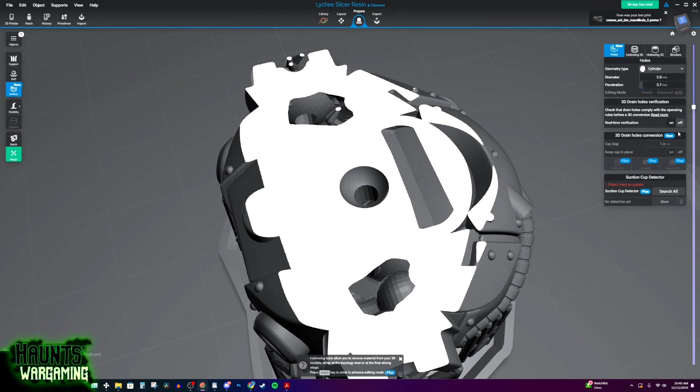I have been using nanobulbs mainly to cure the interiors of my models. The only things smaller than that are fiber optic cables, and I haven't really had much success using those. So I stick to nanobulbs. The one that I use is, I believe, 3 millimeters wide, but then the base is closer to 4 millimeters wide, and then the actual cable, since it's wrapped with tape, it's about 5 millimeters wide. So that means that any hole that I'm sticking that through needs to be at least 6 millimeters wide. Because ideally, you never want that cable to touch any of the resin that's uncured, because you're not going to be able to cure the resin as easily once it's on the cable.

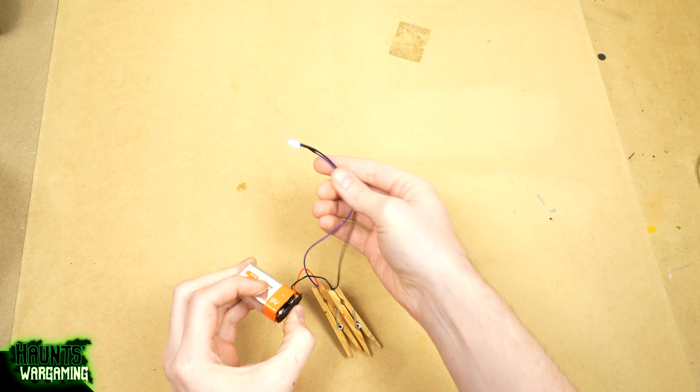So originally when I started doing this, I was just buying nanobulbs separately and then just attaching them to a battery. One thing I don't think I've ever heard anybody talk about is the power of the battery. Most people I see using 9-volt batteries. The more powerful the battery is, the stronger the beam is going to be. My biggest issue with batteries is that they die over time. And because of that, you get a gradual decline in the strength of the light.

That's why I prefer this plug-in model that I bought on Etsy. Since it plugs in, it has a consistent voltage, and it's nice and strong. It's pretty comparable to the 9-volt battery. You can see it's a little bit stronger. The 9-volt battery will work, but if I ever have a chance to buy the plug-in version of something over something that's battery powered, I always go with the plug-in version because I like to have that consistent power. I just don't really like having to deal with batteries. Either one will work pretty well for you, but I prefer the plug-in version.

Also, another thing nobody ever really talks about is how narrow the beam of light is on these bulbs. Think of that beam as the sweet spot for optimal curing. When you're curing the inside of the model, you want to be able to focus that narrow beam on every surface of the model for at least a few seconds. If that isn't possible, one thing I do is I'll add some water to help reflect the light.

As far as software, I use the free version of Lychee Slicer, so I'm not going to be getting into any of the pro features. I personally don't think you need them for this type of work. There are a lot of great features in the pro paid version of Lychee Slicer. I just personally don't feel like it provides enough value to justify me paying $10 a month for it. I wish more companies would go back to the pay once and you're done model. Like if they would offer a lifetime license for like $60, I would buy it today.

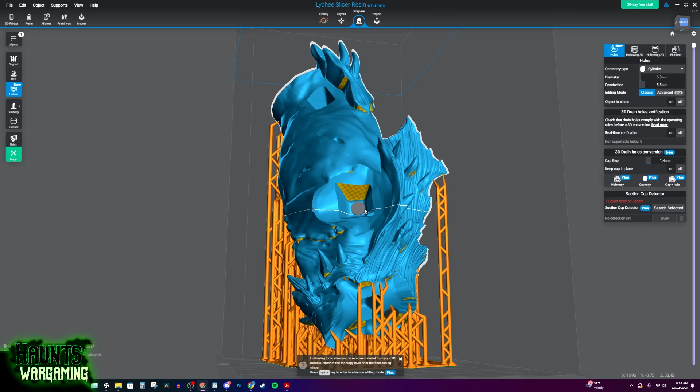This one down here's 5, up here 5 again. There's one over here that's also 5. So the first thing that I do is start looking at the inside of the model, and I work from the bottom up. You can pretty much just get rid of all of these.

And one spot that I've found that's consistently good for adding holes is where these key spots are. These are the spots where you connect two pieces. So we'll start down here at the bottom. This is the first spot that I want to look at. I'm going to put a hole on the back side of that.

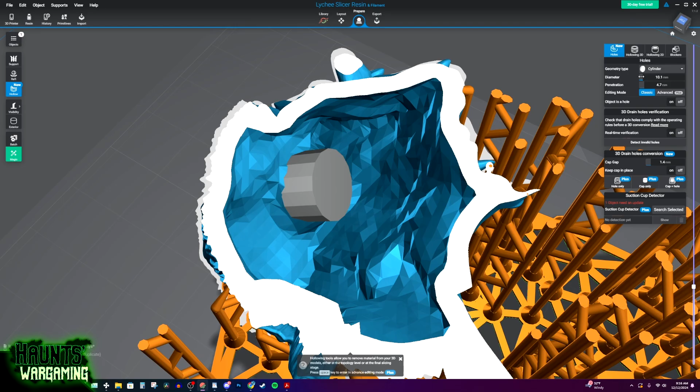I'm going to widen that as much as I possibly can. I don't want it to go into the sides. I just want it to flatten out that nub as much as possible. Something like that. The penetration is pretty good for where it's at. Then I'll just scroll through that, make sure everything's looking okay, make sure there's no islands. It's looking good. And you see that's going to give us a much wider hole.

And while we're down here, that's going to be the primary hole for this section. You can add smaller holes just to kind of help with drainage, but you need to have those holes for curing as well. And that's one thing that I just consistently do not see in these models. I think there was a hole here before. That's a good spot. These don't need to be any deeper than the actual wall.

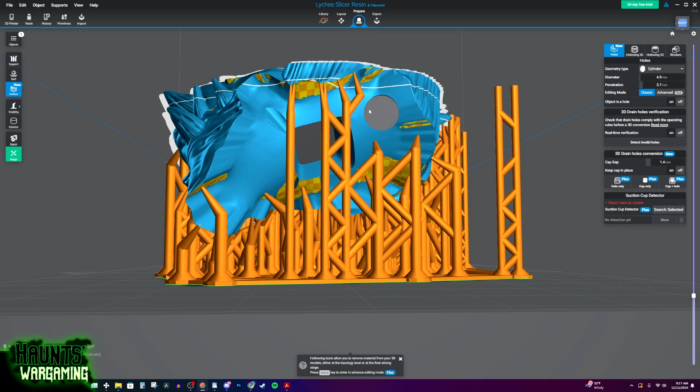So we can take that down to like 4. That's good. Put another one over here. That looks pretty good. Move up to the next one. You can see there's a spot right here. You've got to watch out for spots like this that might be tricky to get light into. This to me doesn't look like it needs to be supported, so I'm going to delete these supports.

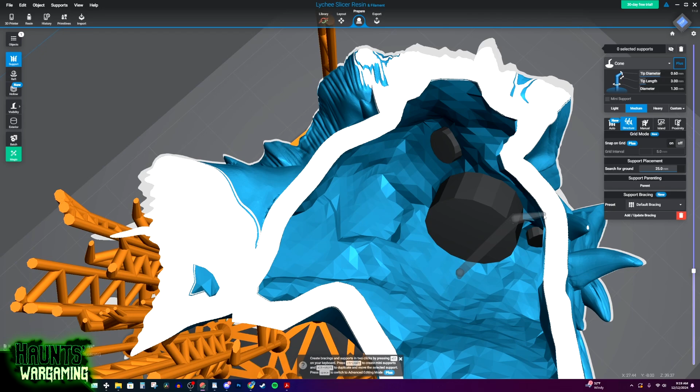This one I'll keep in, even though I think you'd probably be okay getting rid of it, but I'll keep that in because it's not going to block as much. The thing with internal supports is that they're going to block the lights and keep anything back here from curing as well. So another rule that I have is to try and use as few internal supports as possible. It really just makes me cringe when I see a model that's just absolutely filled with internal supports. Like that's just one of the cardinal sins to me.

Going up here a little further, you can see there's another one here. Same thing, I'm just going to make that as big as I can. You don't want it to go into the sides of the model. Just make it a little deeper, and that's looking good. Same thing over here. Same thing over here. This one's a little bigger.

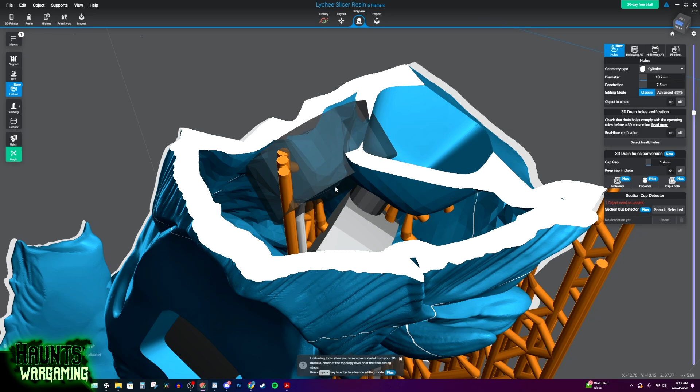Now here you can see there's a bunch of supports. We're just going to ignore those for now. I want to get my holes in place and then see which supports I can get rid of, which supports I can move around. Up here at the top, it's getting a little trickier. There's a lot of congestion, a lot of spots kind of connected and very close to each other. Again, we just want to make sure that it's not going into the wall. See right here, it's going into the wall a little bit. So I gotta adjust that.

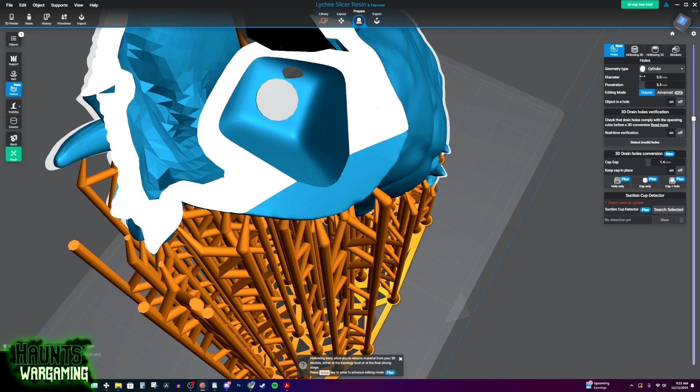Looking good. And for this top section, since there's so much going on down here, I am going to go through from the outside. I'm going to leave this one in place. I'm just going to make it a little bigger. And I want to make that as shallow as possible, about 2.5.

So yeah, that's all of our holes in place. You want to make sure there aren't any holes on the outside of the model. That's just going to be more work for you post-curing. The point of this is to make the post-processing as easy as possible. So now we have to redo the supports. You can see since I blocked this whole spot off here, we don't even need these supports anymore. Don't even need them. So you can just delete all of those.

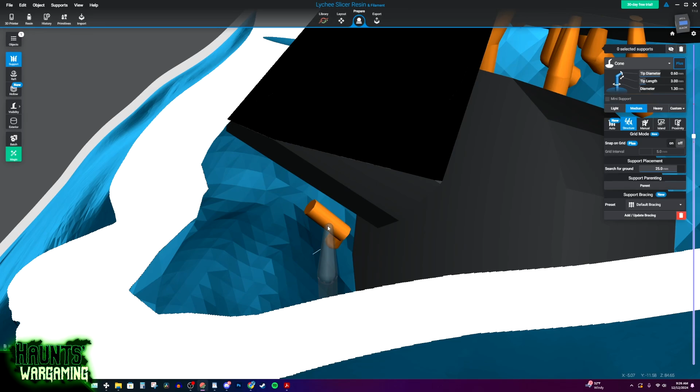There's a tiny spot here. It can be a little tricky to get your camera positioned right. So with this spot, I'm just going to increase the penetration of this hole a little more. There's a spot here that glitched out and it won't let me delete this. If I was actually printing this out, I would have to restart at this point to get rid of that. But I'm not going to do that.

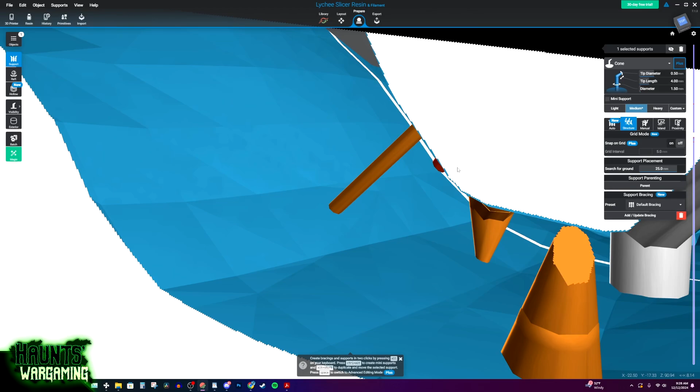I'm just going to keep deleting all of these supports. You really have to be careful that you don't accidentally delete the wrong thing here. There's an island here. I have to support that. And I'm just going to make this hole here a little skinnier so I can put a support underneath it. I like to have at least 3 supports if possible whenever I'm supporting stuff. Gonna move that one over there. It's gonna glitch out like crazy.

That looks pretty good. Then I'm just gonna run through everything once again. Make sure everything's supported properly. There is a spot up here at the top that got cut off. You can do something like that. I'm not sure why these are turning red. Sometimes they do that. The supports should be fine where they're at.

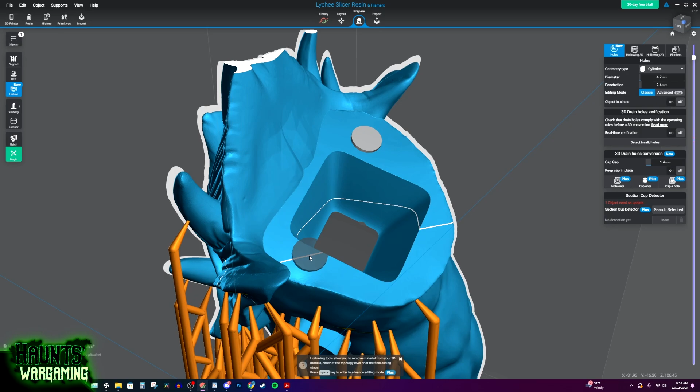Whenever I'm adding supports, I like to add a few more contact spots. That's why I put these in here. But yeah, that should be good right there. We could even probably move this one over a little bit. So yeah, that supports that little extension there. And like I was saying before, if you want to add more smaller holes for drainage, you can put those on these spots right here. Spots like this.

Adjacent to the main hole. I wouldn't add any around this spot because you might have to fill that in. But like you could put one here, here. This entire back section here could be open. I just want to make sure that doesn't mess with my supports. It's looking like that's gonna cut into the support a little more than I'd like, so I'm not gonna put that one in. But we can put one down here. And that's pretty much it for this one.

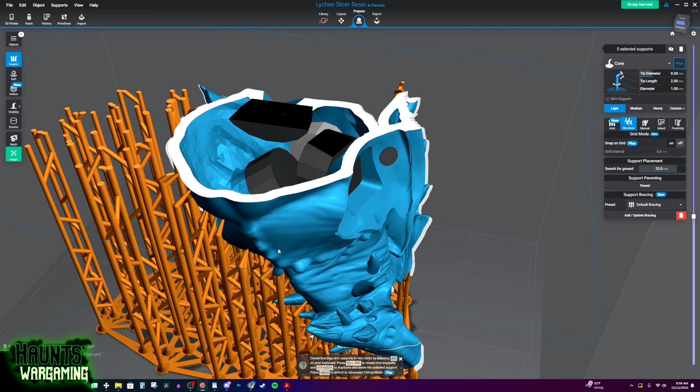My biggest concerns with this model were these flares here that kind of go along the back. Since they protrude pretty far out, I just wanted to make sure that I was going to be able to get a light back up in there. And I should be able to feed a light through this hole here, up into this section here. And then the same thing on this one. I should be able to feed it through here and get this spot. The rest of it should be pretty easy to get to.

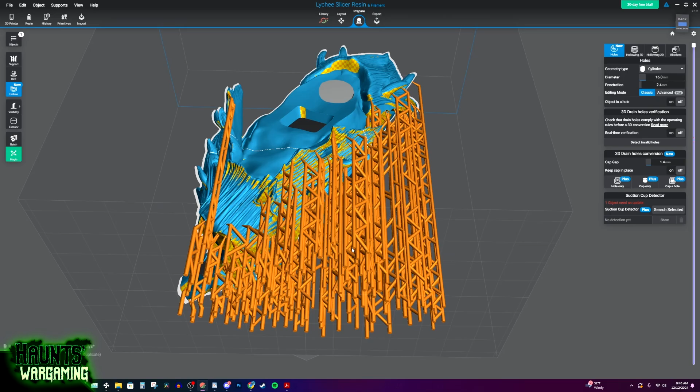Again, it's going to make it a lot easier to get a light in there with wider holes. These two could easily be 6mm as well. But at this point, we do have enough access holes. There you go, I made them 6. One last thing I do is I look at the underside of the model and I try and decide whether or not I want to add more supports. I think this one looks pretty good.

If you're worried, you could definitely add a few more. There's plenty of space for it. Usually with larger models, I will go in and add a few extra medium supports. It's really on a case-by-case basis, whether or not I think it needs it, how many I think it needs, but it doesn't hurt to have extra supports. You know, the worst thing is to have a print failure because it wasn't supported enough. So I like to avoid that when possible.

This is the hull for the attack vehicle for the Human Defense Force. So one of the first things I want to point out is that a lot of companies will give you the STL and the LYS file. And you always want to use the LYS file whenever possible, just because you have more options. With the STL, everything is baked in, but with the LYS file, you can go in and you can change things. You can change the supports, the holes, even the internal hollowing.

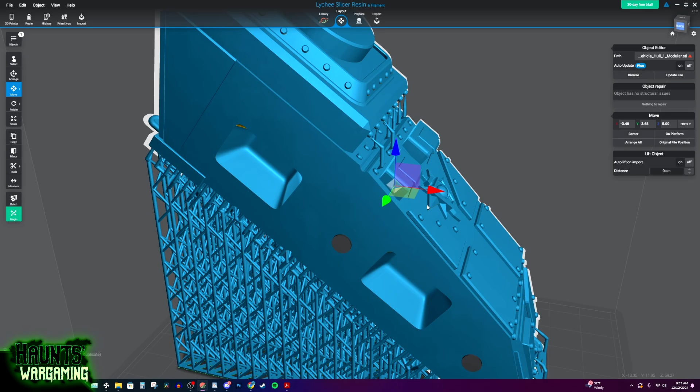Whereas with the STL file, everything is baked in and you're really limited with what you can do with it. So we're just going to delete that STL file and just trust me when I say that you should never use that file unless you have to. So with this one, we're looking at what's been done here.

I see two holes in the bottom here that are coming through the hull. You're just going to have to clean those spots up if you leave them there, so you can go ahead and delete those. The rest of these, they're in good spots, but they're too small. There's only two internal supports here, which are going to be easy to work around. We just need some bigger holes.

So we're going to start at the bottom here and use these keys as access holes. You do want to leave a little bit of a lip around the edge here just to kind of help to hold the track in place, which is going to socket into this. That looks pretty good. The nice thing with these is they're all pretty consistent, so you can just use the same hole on all of these nubs.

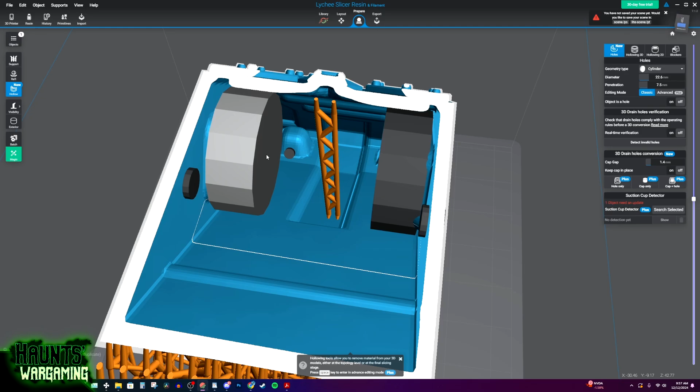You can also make these holes a lot wider. I'm going to bump that one up to about 15, 16. Same thing with this one. I know this entire edge is going to be covered up, so I can just put holes along that entire edge if I want. Opening it up like this is going to make it so much easier to wash and cure.

And then the most obvious spot in the world to me for a hole is right here, where the turret sits. Going to make that nice and wide. 20 millimeters is plenty. And we want to make sure that that's deep enough that it penetrates the whole way through. Looking good. Yeah, these supports are fine. They are supporting two spots there that would need supported, so I'm going to keep them in.

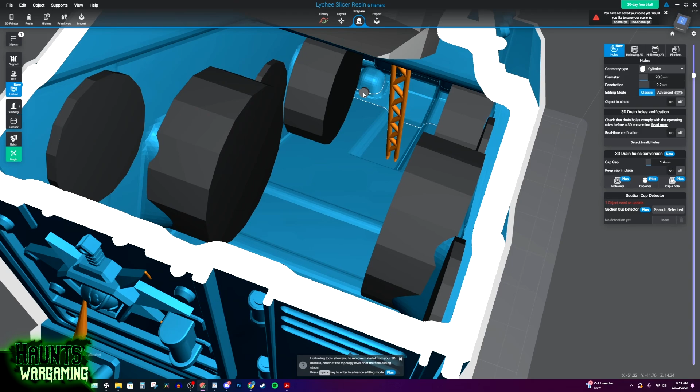There's these little holes down here. Those are fine too. I'm just going to move them up a little bit. Make this one a little bigger. The bulk of this thing has plenty of supports. I'm a little concerned about this area. We want it to get off to a good start, so I'm going to add a few more. Nothing crazy. And yeah, that's about it with this one.

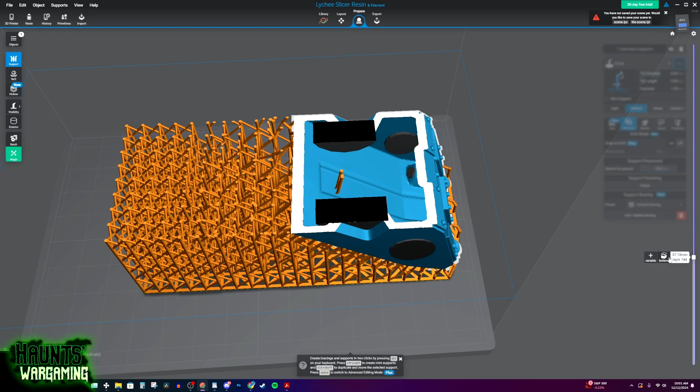You always want to look at the layers one last time to make sure everything's looking good. Make sure there aren't any unsupported areas. And that's looking pretty good.

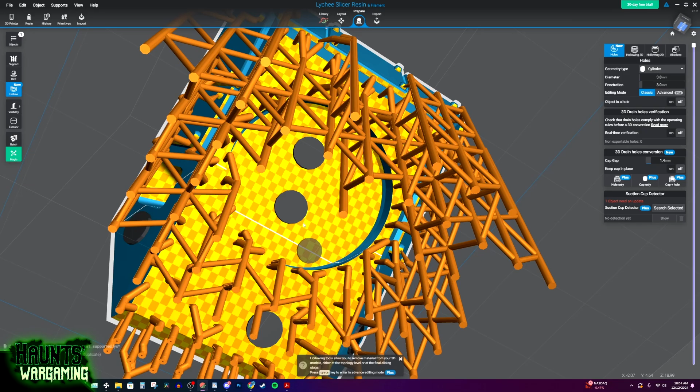This is the turret for that model. In my opinion, this doesn't even need to be hollowed. If you're really trying to save some resin, you definitely could. I would just widen these holes up on the bottom here so you can get a light in there a little bit easier. This thing's only maybe 12 millimeters thick, and that just doesn't really justify being hollowed to me. It just becomes more of a pain than it's worth, in my opinion.

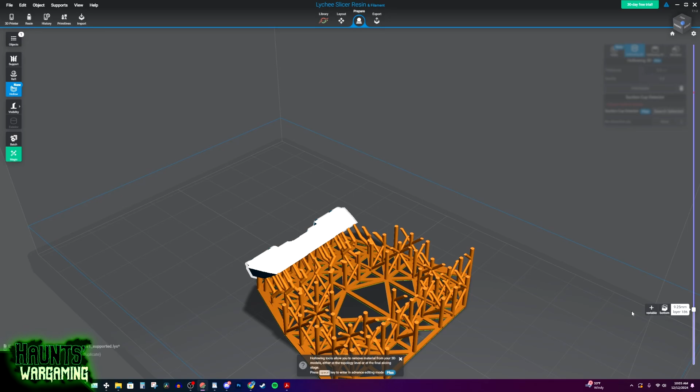Me personally, I'm just going to delete the hollowing. It's really easy to do that with an LYS file. You just go under Hollowing 3D and then just click this little trash can here and it'll just delete it. That is going to use some extra resin and it's going to add some extra weight, so you do want to double check and make sure that it doesn't need more supports. This one, I think it has enough supports.

I'm just going to go through and bulk up a few of these supports. You can select multiple supports by hitting shift and then I'm just going to turn those to medium supports. A lot of the times if there's already quite a few supports, just making a few of them medium instead of light should help hold it in place. If you're worried about it, you could always add some more supports here, but these are pretty dense, so I think it'll be all right.

I'll go through the tracks as well for this one. So with this one, you have kind of a bit of a hook on the inside here, and there's a spot along here that I feel like is going to be kind of tricky to get a light into, especially on the back side here. I don't think my light would fit in there, and I don't really want to put some holes on the underside here because this is the outside of the model and I don't want to have to do any repair work. Again, it's just more work than it's worth.

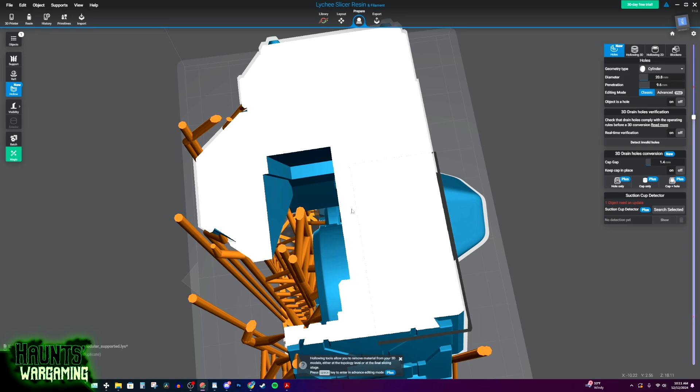So I took those holes off, and then what I'm going to do with this model is I'm going to delete the internal hollowing, and I'm going to put some holes in the side here. I want to make them just deep enough that they don't quite reach this edge here, leaving about 1 or 2 millimeters between this edge and the hole. And then we're just going to place those along the tank.

Put one there, smaller one here. Got to make sure it doesn't dig into this edge here because that's going to be visible. And you don't want to go right up to the edge. You want to leave yourself some room around the edges here. You want to make sure that the structure of the model stays intact. See here, I accidentally made this one way bigger than it should be, so I gotta bring that back down, go up here. So it's gonna look a little something like that.

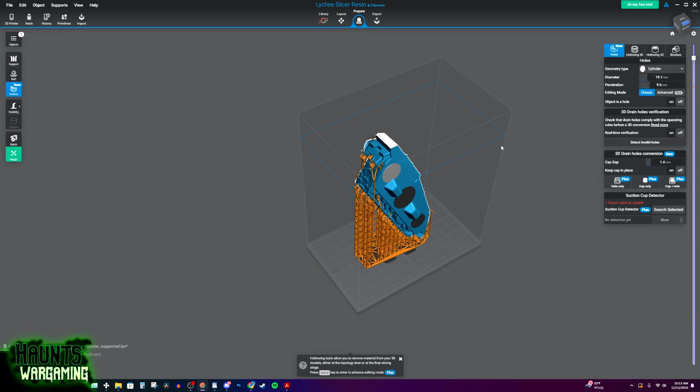I'm not saying you have to do it this way. This is just one way to simplify the post-processing for you. Yeah, you're gonna use a little bit of extra resin, but you have the peace of mind of knowing that this is fully cured. You could add more holes if you want, if you really want to try and save some resin. You could add a couple more, and then just make sure that it's not poking through the other side anywhere. See right here, that's poking through. So I'm gonna decrease the penetration a little bit. This one's pretty close. Gonna take that down to 9. That's looking good. There you go.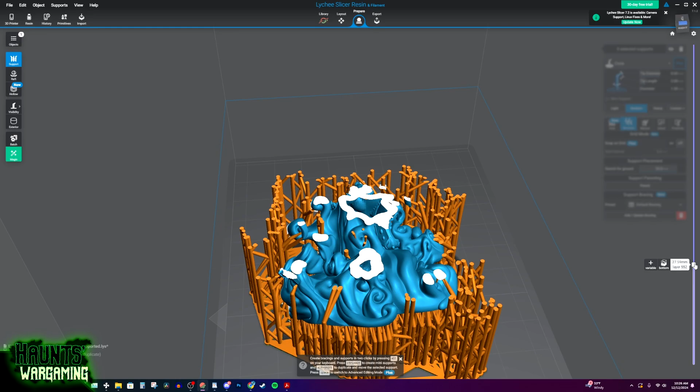Next, we're going to look at the Great Screecher from their Shadow Stalker line. Personally, I really don't think that this model should have been hollowed. So if you look at the inside of this thing, you can see that it's kind of like a hook shape. There's a decent sized chamber at the base, and then it gets really skinny right here at the midsection, and then gets wider up towards the head.

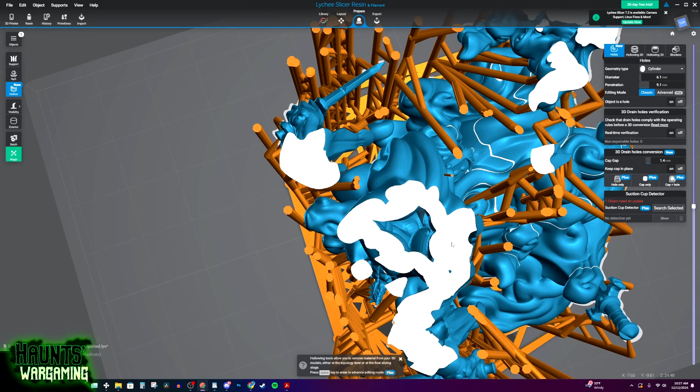So you would have to be able to fit a light up through one of these tiny holes and somehow curve it like 90 degrees and jam it up through this really tight passageway all the way up into the head. And this passageway at the smallest point, I would guess is maybe about 4 millimeters wide, which is not enough space to get a light up in there. And again, the most important thing you want to ask yourself is, how am I going to get a light into this model to cure it?

Fortunately, with this model, you can just go to the Hollowing 3D and delete the internal hollowing. You could leave the 2 drain holes in on the bottom here, but there's really no point in doing that, so I'm just going to delete them. Then I just want to scroll through and make sure there aren't any cavities or anything in this model. Make sure everything's supported. I know there are a lot of tools that help you identify this stuff, but personally I find it just as easy to scroll through and actually look at it. I know my eyes aren't going to deceive me, whereas an AI algorithm definitely could.

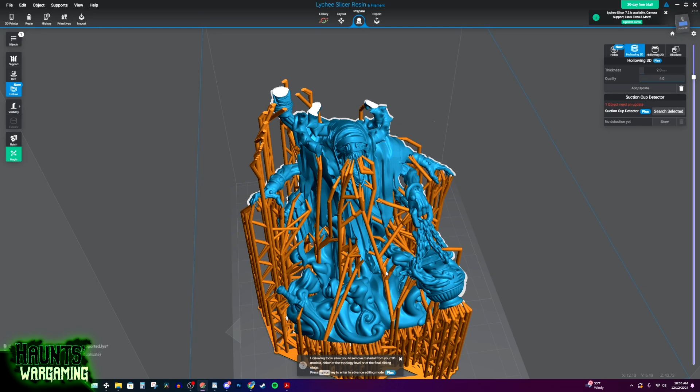And as good as this software is, I don't think it's ever going to be that good that it's going to be able to completely avoid any issues. I think there's always going to be a certain amount of tweaking you're going to have to do to these. Other than that, the supports look pretty good. I think there's enough there to support the thing. It's got quite a few. So, good to print. Save yourself the headache. Don't hollow this kind of stuff. It's really not that big of a model.

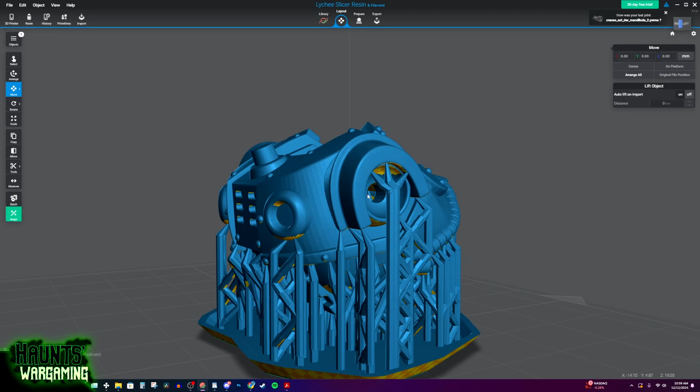This is an Exutar model from Station Forge. So this model is about the size of a marble, pretty small, and it's still hollowed. These holes are about 2 millimeters wide. There's one there, one at the neck hole, one there. There's a slightly larger one on the bottom, but none of these holes are large enough to get a light into.

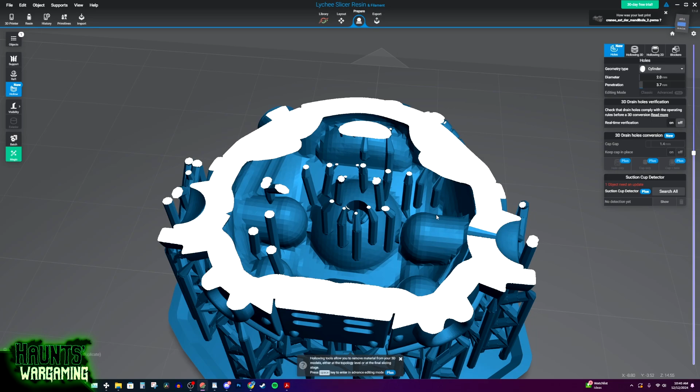And honestly, they're so small. If you do water washing, the surface tension is going to keep the water from going in and out of these holes. And there are so many internal supports that it's going to make it really difficult to get a good full cure on the inside of this thing. So this is a pretty good candidate for just not even hollowing.

This is an OBJ model. Fortunately, they do provide the non-hollowed version of this. For something like this, I would definitely suggest using that. It's just way too small to justify hollowing. Save yourself the headache. It's going to cost you an extra 5 cents. You're not going to have to worry about uncured resin leaking out 6 months down the road.

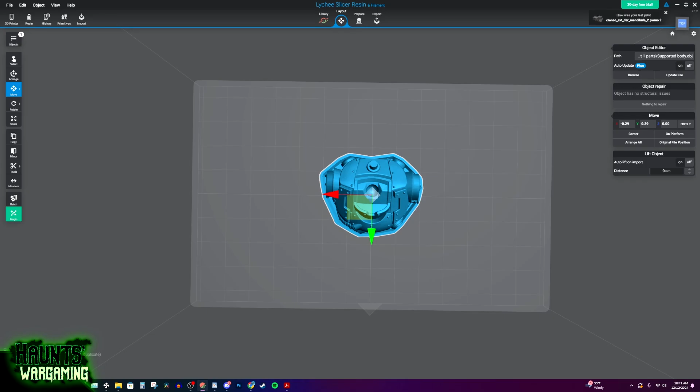I don't really have a lot of examples to show you of stuff that isn't supported. Pretty much all the files that I have are supported. I think it's become pretty standard at this point, at least in the wargaming community. Here's an example of a model that wasn't pre-supported or hollowed. This is part of the Junk Fort Ramparts set from Printable Terrain.

Just a quick scroll through this model will show you that there are a lot of internal cavities in this model. And stuff like this, you would have to do so much cleanup work to fix this file to get it to the point where you can resin print it that it's not even worth resin printing. Stuff like this, you just want to use an FDM printer for. There's just way too many cavities in this thing.

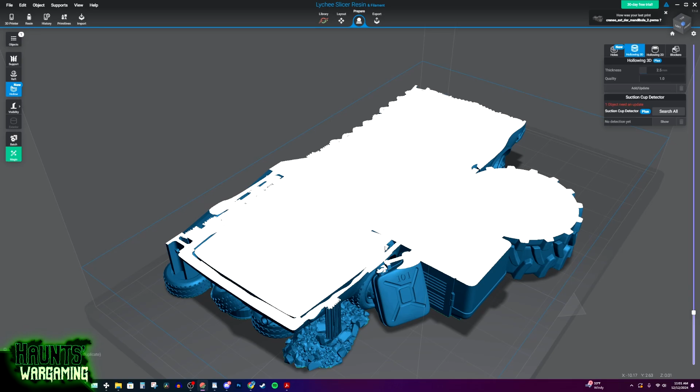I also wanted to show you that in the free version of Lychee Slicer, there is the option to do 2D hollowing. That generates this sort of lattice pattern on the inside of the model. I also wouldn't really suggest using this. It's pretty much going to be impossible to fully cure something like that. You could bump the infill down to maybe 10% and be okay, but anything over that, in my opinion, is just too much. Personally, I try and avoid using 2D hollowing, but it is nice to have the option to use it on the rare occasion that it's useful.